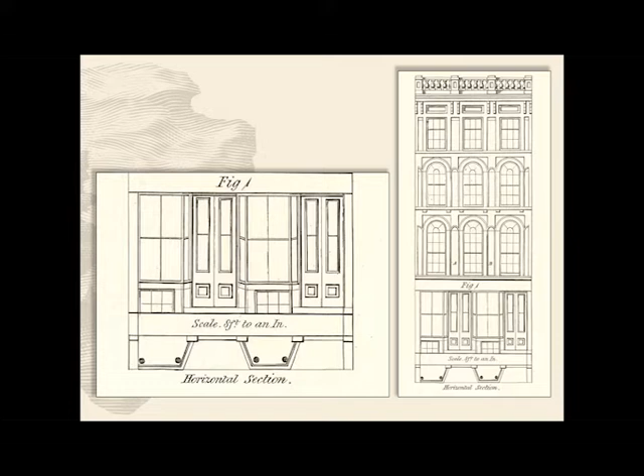The building's structural support was not uncommonly supported behind the storefront rather than always incorporated into the storefront frame itself, allowing for much thinner, more delicate framing profiles. You can see some historic drawings of that configuration there. Very thin framing profiles and metal construction became widely used for storefronts much earlier than people realize, even as we start to dig back through all this.

Storefronts have a wide range of distinctive materials as we continue through time. In the 1920s and all the way through the 50s, pigmented structural glass with trade names such as Carrara or Vitrolite became very popular. While these might not be the original storefronts per se, a structural glass storefront often has achieved significance over time and should be retained. Preservation Brief 12, available on our website, deals with that, specifically with structural glass.

By the mid-century, storefronts were characterized by bright, bold colors and signage. We had aluminum finishes, clear aluminum designs that incorporated the entire facade of a building. These are things to consider when you're looking at perhaps a district's period of significance. Were there modernization efforts that were across the board that alter these buildings significantly, and are they important?

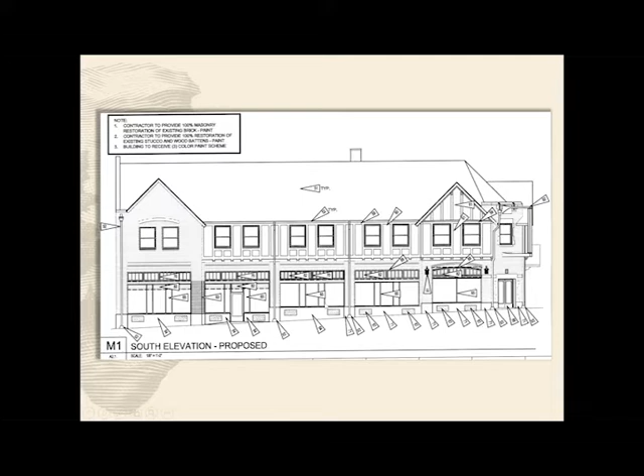For the new design of replacement storefronts, the architect was attempting to reference the historic configuration without actually replicating what was there. So we see them trying to simulate where those central entries were, and we end up with these additional vertical mullions that create odd small pieces of glass within the storefront—an incompatible configuration.

So in consultation with our office, they cleaned that up a little, removing the extra vertical mullions that weren't necessary, and widened those into a three-part display window system that was appropriately proportioned. The new storefronts at the end of the day are compatible new features, and it turned out very nice compared to where we were at the start of the project—a little bit of tweaking.

Again, we're not forcing people to restore, even though we have a historic image. It just has to be compatible if it's missing. But you do have to be careful about what compatible means and how those details actually lay out on paper.

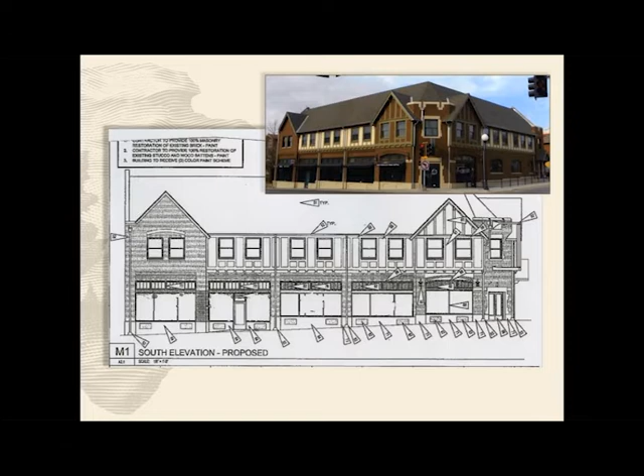So in thinking about new compatible storefronts, the most important factor we consider in our office is that when a storefront is closed, the design must either match the historic configuration or be compatible with the historic building.

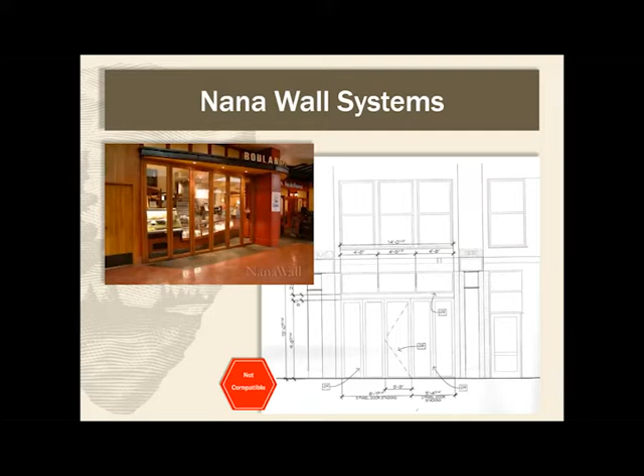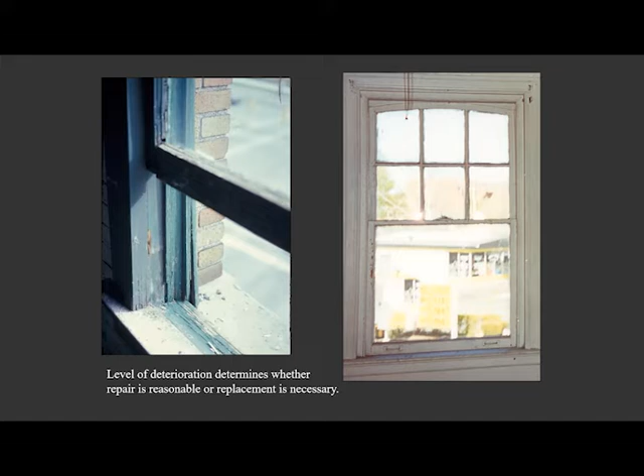The level of deterioration is important as we start to assess these. The true condition of a window may be concealed by peeling paint and missing putty, and those things are easily corrected. Even severely weathered surfaces and pockets of decay may be repaired with treatments such as modern epoxies, but it's most reasonable to make this sort of repair only if it involves pretty limited areas. If you have a lot of windows with the same repetitive issues, that might not make sense, and replacement might be warranted.

When we evaluate windows for repair or replacement, deterioration should be the primary concern in evaluation. Though there can be other factors to take into account, note that the desire for easier maintenance is not justification alone for replacing windows. We often see that - people wanting to shift from wood to aluminum just because it's easier to maintain. There are a lot of other factors we have to look at before you can make that decision.

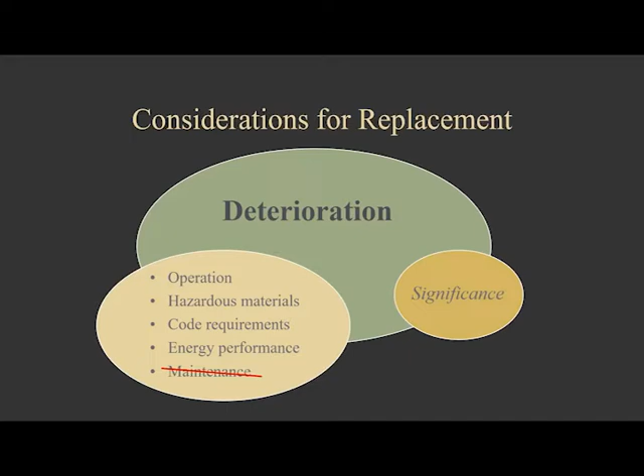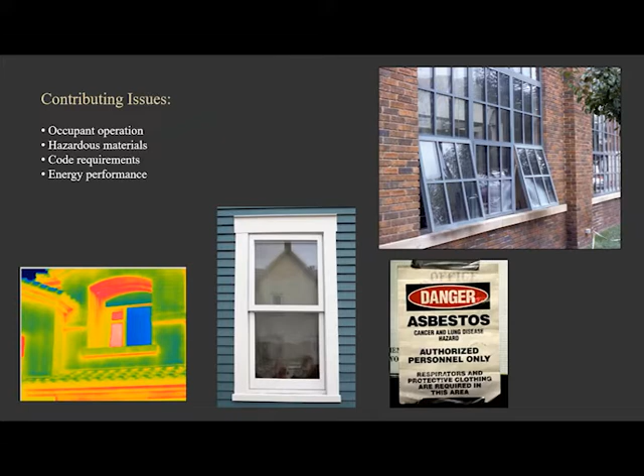Some of the contributing issues we consider help determine the practicality of retaining and repairing windows in conjunction with deterioration. These include operation, depending on the new use of a building; hazardous materials, perhaps lead paint or asbestos glazing compound; code requirements for life safety, whether fire code or egress out of residential use; and energy performance, which is the most common desire in new window applications that we have to consider.

Typically, a full, detailed, extensive window survey is not always necessary. Kim mentioned earlier that there may be situations where we do ask for that - it depends on the building and what's happening. But for every project, we don't typically require that. We do need adequate photographic documentation, both interior and exterior. It's important to show both sides of the window.

The exterior side of a window might have significantly different conditions than what's happening on the interior, so it's important for us to know what's happening on both sides.

Photographs should be keyed to plans or elevations. Look at what existing conditions there are. There might be storm windows on the building right now helping protect windows, and if so, the condition of those windows underneath might be in better shape than ones that don't have them. It's easy to look at peeling paint and cracked putty and say these windows have to go, but there's a lot more to it than that.

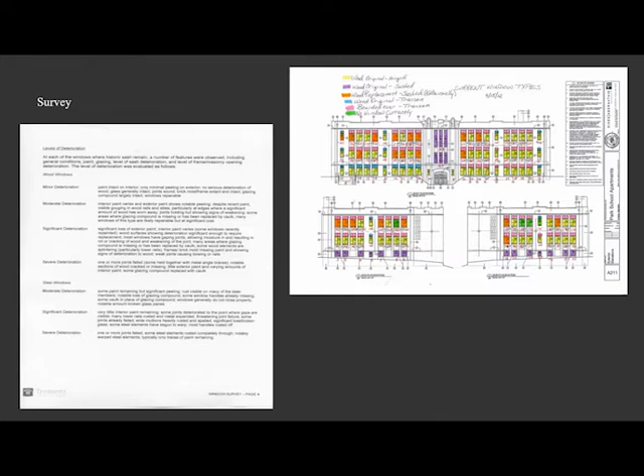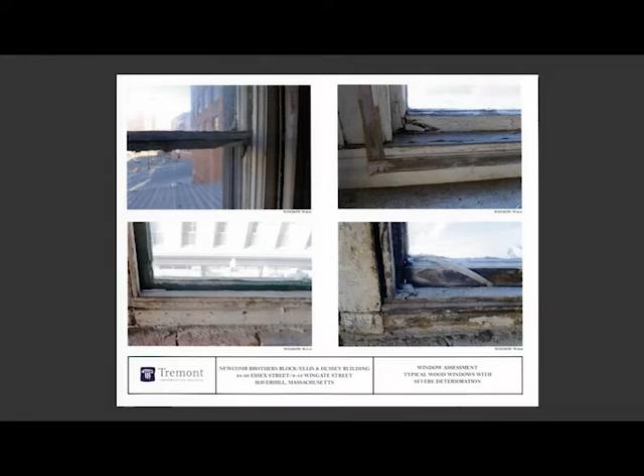But regardless, photos are key here. We need really, really good photos. Just standing a mile away looking at the exterior of the building is not going to help us. So get that telephoto lens out on the exterior, get up close to the windows on the interior, and really help us understand what is happening with these. Because unfortunately, as much as I would love to be, I can't get out there and see all these buildings in person. So I really rely on you all to put together that information to help us review this and help you through the application process.

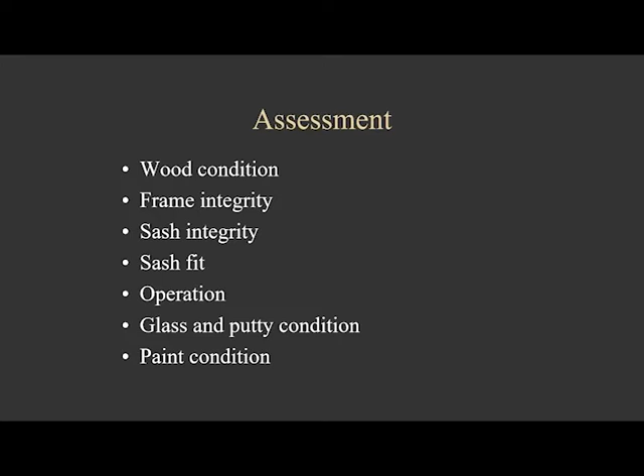Here's just a quick list of, as we start to assess windows and all the pieces and parts that go into it, what we start to look at. We've already talked about some of these.

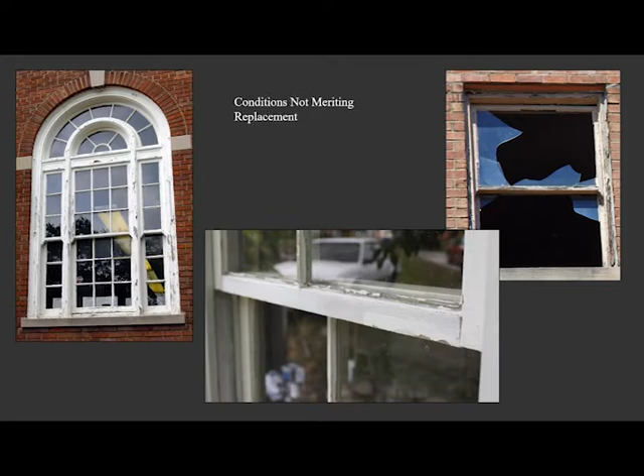Here's some photos that show conditions that do not warrant replacement. On the far left, you have some peeling paint. It's very superficial, you can scrape that and repaint it, and it's good to go. The middle image shows cracked or missing glazing putty that can be easily repaired. On the upper right, you see broken glass, which is also easily repaired. These might look a little scary or daunting at first, but when you take a closer look, these are repairable conditions.

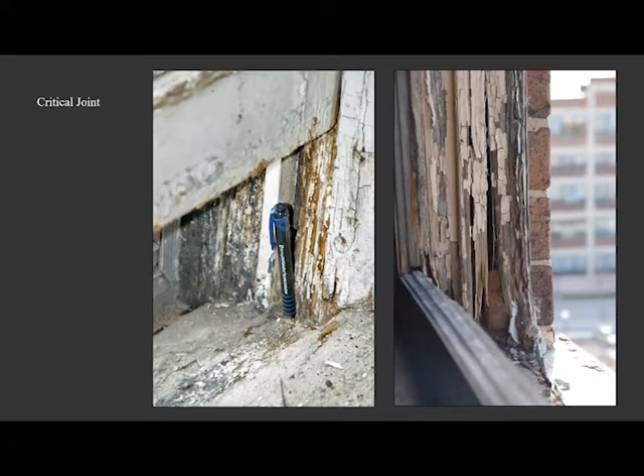Here's one that is so bad you could shove a pen down into that joint, and that's a critical joint in the structure of the jamb. The image on the right, you can see we've lost a lot of the profile section, and if you were to try to screw anything into that, it would just go right through or fall off the face of what solid structure remains. So detail photos, I think that's the key thing here, is look at how much information you can share with us by giving these detailed photos as part of your application.

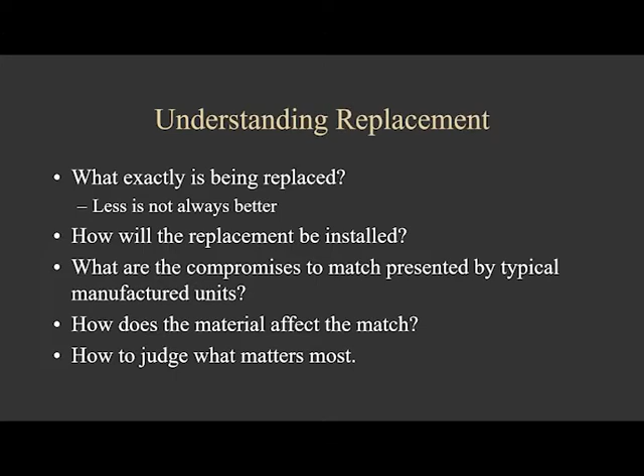So if we start to then look at understanding replacement, what is exactly being proposed for replacement? Sometimes replacing less, the intention is good, that you're trying not to touch as many things, but it isn't always better, and we'll take a look at why. Then the question is, how will the replacements be installed if we do agree that replacement is necessary? Are there compromises we're going to have to come to based on the available manufactured units and the type of window that you're needing to put in the building? How does that material affect the match? Based on all of these, then we can judge what matters most in these window components.

Just a quick side note, we see a lot of projects that retrofit existing historic windows with insulated glazing units. It's not impossible, it's certainly doable in various types of windows, so always something to keep in the back of your mind. But let's get into actual window replacement and what these start to look like, and why we need to be cautious and careful in the details.

Let's take a look at what each of these main three components are. If we're looking at wood windows, there are three basic things that we look at. It's the sash, highlighted here in green, and you can see where that sits in the section.

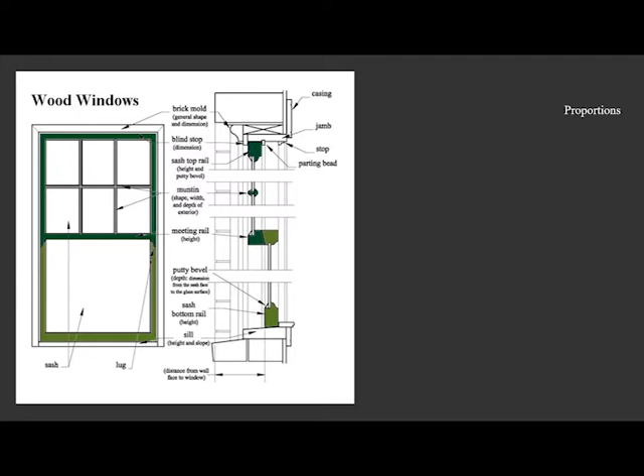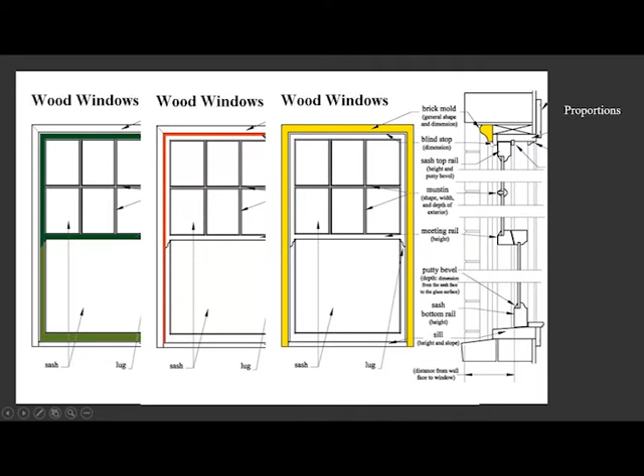Next comes the blind stop, which is historically the small piece that held the sash in place, and that runs all the way around three sides of the window. And then the brick mold, which is the outermost trim part, which is where the decoration tends to come. These are typically profiled, they can be stepped, depends on the window. But when we talk about a basic compatible three-part configuration, this is what we're referencing: the sash, the blind stop, the brick mold.

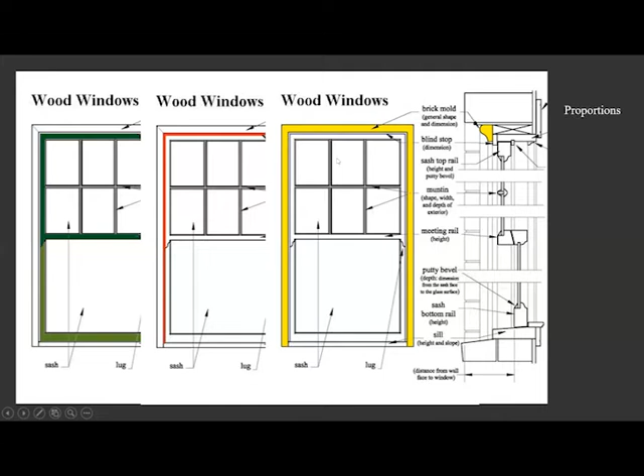So let's say you only need to replace the sash. If the jamb and the frame is all sound, but the sash are rotted, you can certainly have new sash manufactured. In this case, the sill should still be repairable, so you get a nice clean fit at the bottom of the window. Advantages to this are you keep a lot of historic material, insulated glass may be introduced, and there's no disruption to historic trim both on the inside and outside of the building. So it can be a very ideal solution depending on the building.

Other ways of introducing new sash are what we call sash packs, where it's a manufactured system of vinyl jamb liner with two new sash that slide up and down on that. The advantage, again similar to reconstructing true sash, is you can get insulated glazing, still no disruption to inside exterior trim.

Just note that there are some visual things that happen with those jamb liners, so keep that in mind if you are exploring sash packs. And dimensions might not be as customizable perhaps as a true reconstructed wood sash.

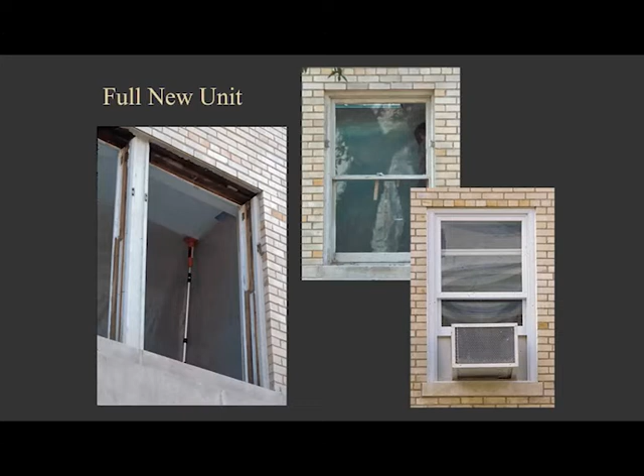Other times we see people proposing just a full new unit, which would slide inside the remnants of the jamb or framing remaining from the historic windows. You have to be careful about this because they can start to skew some proportions. They have a more visual impact. This is what we refer to as an insert unit.

And so this is the big question we always want to know: are you proposing an insert, or are you proposing a rough masonry opening install? A lot of times it's hard to get that information out of people because maybe you haven't thought through the installation all the way yet.

The pro to these is they're inexpensive, and it does keep trim in place. But the con is that they have some significant compromise in those proportions and dimensions, as I mentioned. So you have to take a look at the specific project and building. Maybe an insert unit is a viable compromise. A lot of times it might not be, because of the visual impact that it has.

Here's some examples of an insert. You can see it's very, very clearly a new window that sits inside the historic frame components and trim. And so it does modify the character of those window openings. And then we have a bunch of these on large primary elevations. It does have greater effect.

This is what we refer to as a rough opening replacement or rough opening installation. And here you see that these windows are much better fit to the opening, and they typically replicate that 3-part configuration: the blind stop, the brick mold, and then the appropriate sash reveal. This just gets a better fit to that window.

So a lot of times there are projects where you may be proposing to do an insert, but it might not be appropriate, and you need to explore what it would entail to do an actual rough opening installation.

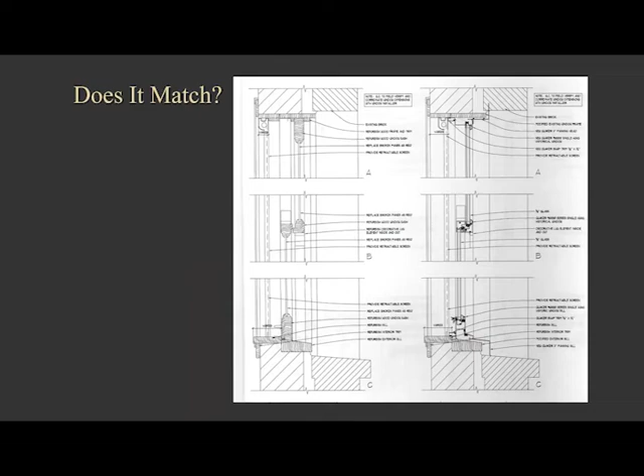So here, this is just a quick mock-up showing you all those components and the dimensions that we would be looking for, both for the existing window as well as the proposed, to then make a determination on the appropriateness of the replacement and match. And here you have both the vertical and horizontal section, you can see at the jamb, and both the head all the way through the sill of the window.

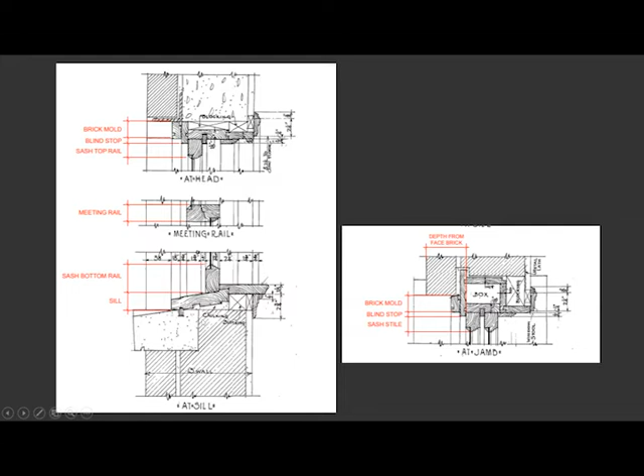And then the brick mold: again, this is the outermost part that can be stepped, it can be curved and profiled, and it's very distinctive in defining the character of a historic window. So if you are doing a replacement, the expectation is that the new brick mold would match that profile to the best ability possible. But there's limitations, as you shift to other materials apart from wood, there are limitations on the details and profiles that you can get.

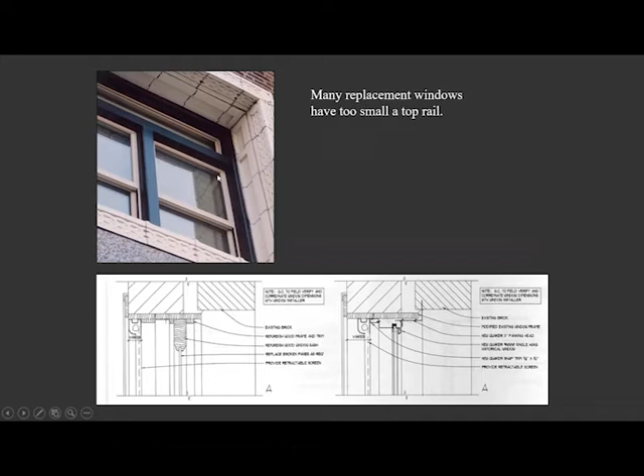Again, here's an example of where that top rail is very, very narrow. You can see the historic on the left in the drawing, and then what the proposed was. That's a big difference between those two. And then looking up the window, it might not make as big of a difference, but it does end up being substantial.

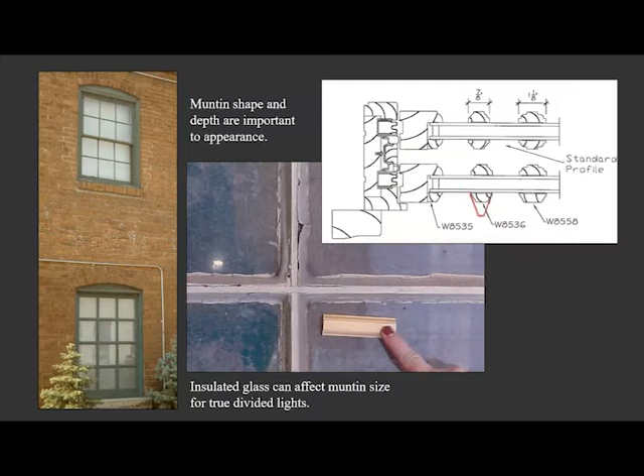Simulated divided lights are the industry term for a three-part assembly, which consists of a three-dimensional external grid applied to the exterior of the window, an interior spacer bar between the glass, and then another grid applied to the interior face of the glass. We have a three-part simulated divided light. It allows for the two pieces of glass for the insulated glazing unit, but what we get is the simulation that true divided light is still there in the replacement window.

It allows for greater flexibility in muntin size and profile, and it can be effective imitation when that component is characteristic to the window and needs to be carefully executed. We regularly approve simulated divided lights in replacement windows.

Looking at steel windows, these often were embedded in masonry wall systems as constructed. So any replacement, keep in mind, we're just going to get a bulkier window. That's just the fact of it, because of how a steel window system was made and installed versus a replacement aluminum. Some manufacturers do it better than others. So those are the details we would look at - are we getting the most minimal dimensions possible or most appropriate versus some that are still more bulkier and inappropriate in dimension and profile.

With the replacement of steel windows comes the need for structural muntins. You can see those running across those windows, and that is to hold up the operable vent. That can't be done in any other way in replacement windows. So you have to take a careful look at how that's detailed, because it can have an impact on the exterior character of the building.

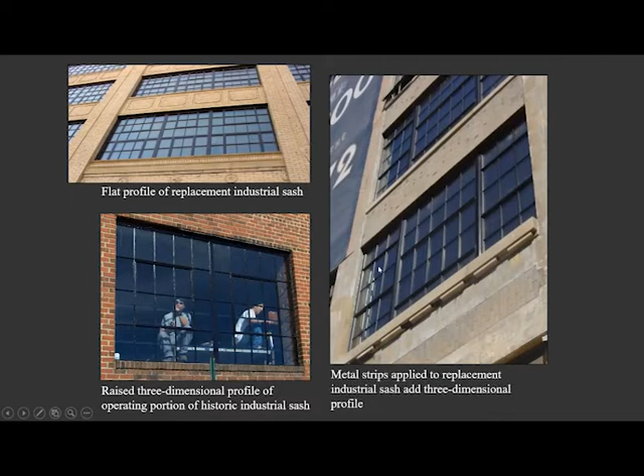If you use applied muntins, they must not be obviously fake. In this case, these ones are bowing from the exterior glass, and that's obviously a very poorly constructed simulated light. Here we only have the interior spacer, so you don't have that three-dimensionality in the exterior expression of the division.

Mullion details are also important. Take a look at mullions—how do these interact with windows on either side of them? How do you detail those in replacements? Are you retaining, are you replacing? That all has to be accounted for within proposed window systems.

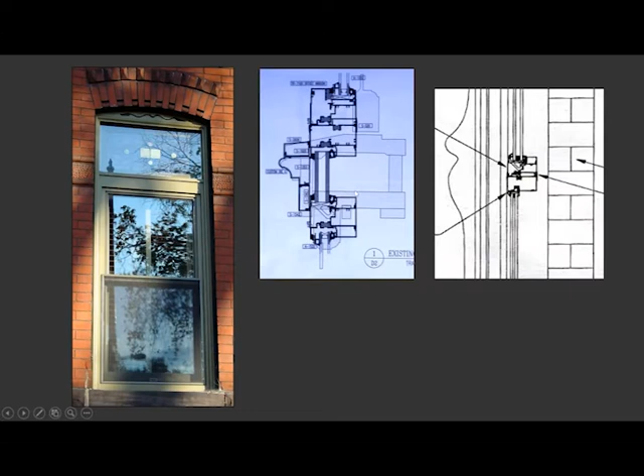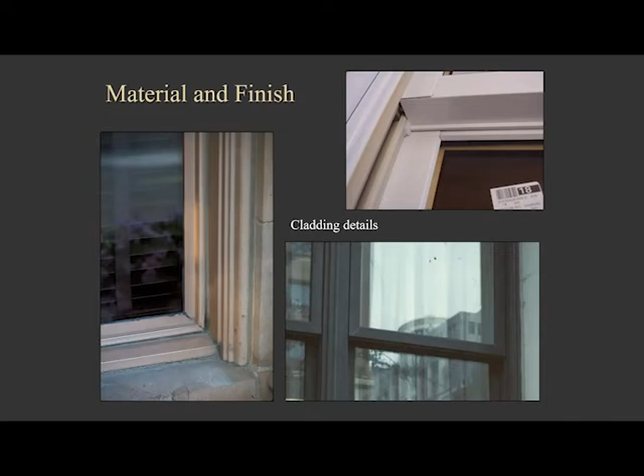Materials—new windows that use substitute materials not only have different finishes, but they also can have different profiles and dimensions from traditional wood, just because they're made differently. They have different assemblies and components. So those are things you have to take into consideration when proposing a replacement, and they can either make a window appropriate or not appropriate, depending on what limitations they have.

Tinted glass did become popular in the mid-century. So if there is historic tinted glass, keep in mind that a replacement would have to actually deal with matching that, rather than just going for a clear glazing replacement.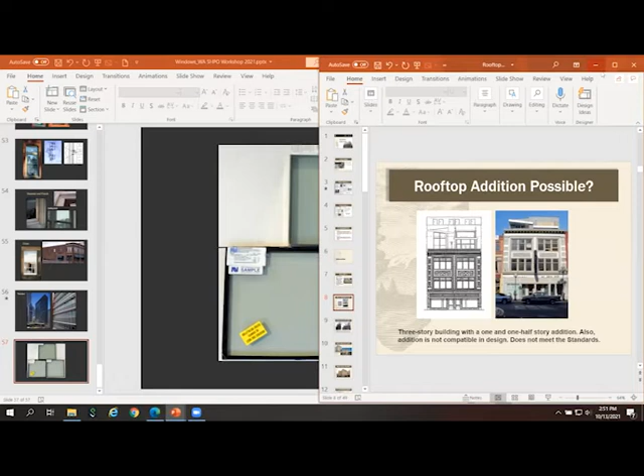And I am quickly running out of time, so I'm going to jump over to rooftop additions. Let me run through this one. Uh-oh, let me start back there.

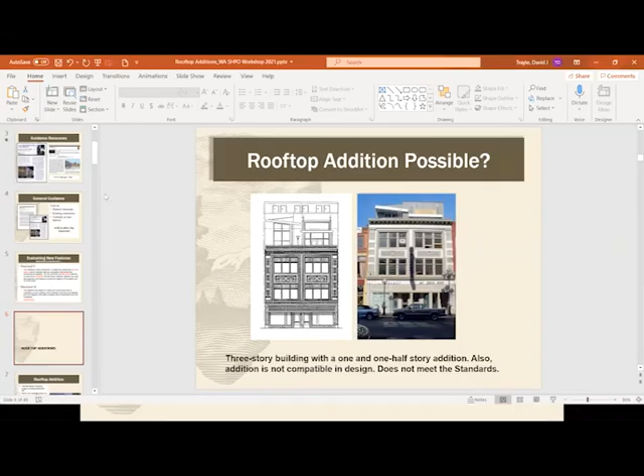All right, so rooftop additions—these can have significant impact to a building. As we see in this example, there are several issues that we look at with rooftop additions themselves in terms of usable square footage, parapets and railings that come with them, and last but not least, we can't forget about any HVAC equipment that goes up there as well.

In terms of guidance, we have a lot of published guidance on our website—please take a look. We have various ITSs as well as a white paper specific to rooftop additions, as well as general guidance for additions in any capacity. So we have to look at the historic character of a building, the existing conditions, as well as visibility, to determine if a proposed rooftop addition will affect the character of the building.

That's the big question. In terms of standards, we can look to Standard 9 and 10 in terms of what is appropriate and how we must review this in context of our program. New additions shall not destroy historic materials.

They need to be differentiated yet compatible. There's that compatible word again, it's very important. Standard 10 references that new additions shall be undertaken in a manner that if in the future they're removed, they don't necessarily... there's a reversibility component to that. You're not damaging the historic property and its environment.

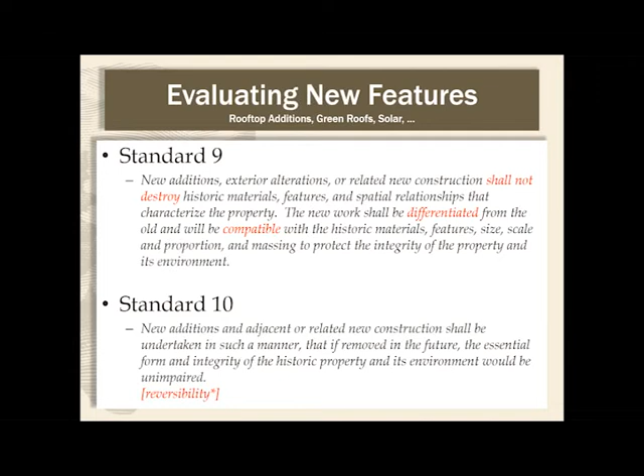Keep that in mind. All right, so let's get into rooftops. Our guidance, our white paper guidance on this has 5 questions that we ask when we're assessing rooftop additions. Number 1, can the historic building accept a rooftop addition at all? Is this the type of building that can handle it?

Number 2, from what vantage points is it appropriate to evaluate the rooftop? How far away can we actually look at these? Number 3, if a rooftop is determined to be appropriate, where should it be placed? Can it take up the full footprint, or does it need to be localized somewhere within that building footprint? Number 4, how much should a rooftop addition be set back? And lastly, how should a rooftop addition make clear what is historic and what is new? How do you walk that line of compatibility?

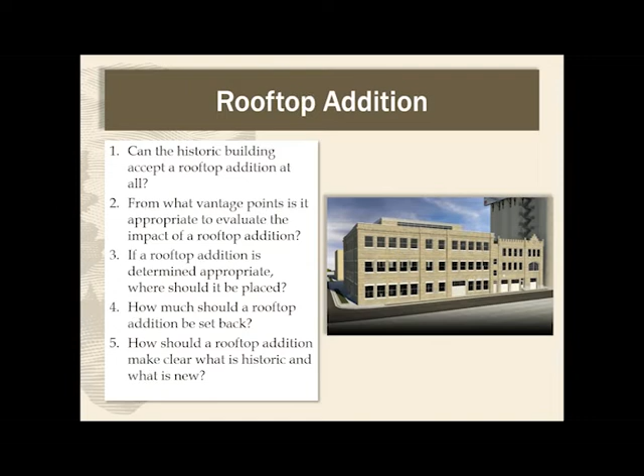So here's a 3-story building that has a 1.5-story-ish addition on top of it. It's also designed in a way that is not compatible. This is just a scale of building that should not be really getting a rooftop addition. Generally speaking, rooftop additions are not appropriate for buildings less than 4 stories tall. Additions to buildings of that size can dramatically change the massing and as a result change the historic character of the building.

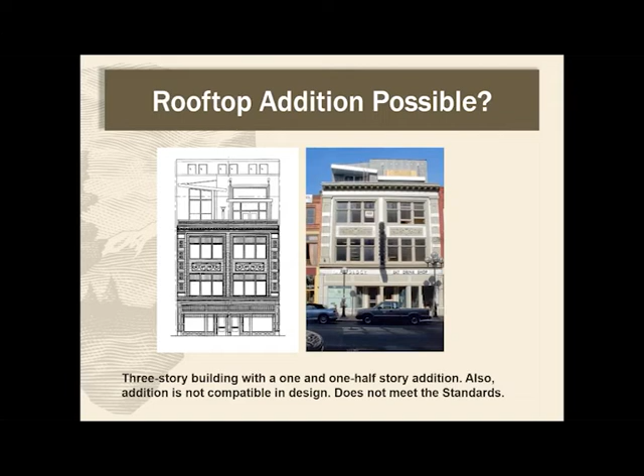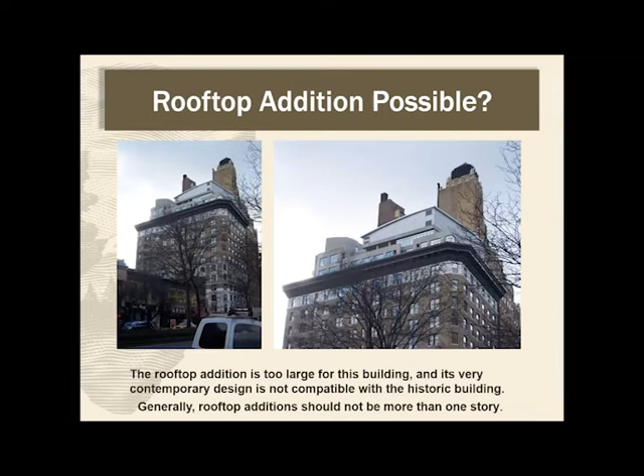So this image shows again that 1-story or 1.5-ish addition on 3 stories. This does not meet the standards. This 3-story addition on a 12-story building is incompatible due to its size and placement, as well as the detailing of it. While it's simple and perhaps a 1-story addition would be appropriate, this is, again, multiple stories. The addition negatively impacts the character of the historic building. This one does not meet the standards.

So the next question: where is it appropriate to evaluate the impact of a roof addition? Distance is dictated by visibility. I will say there's no set dimension. It's not like, oh, anything beyond 500 feet or a block, we don't care or don't look at that. That's not true. Depending on the type of building and the size of addition, that's going to dictate where we need to go to look at that.

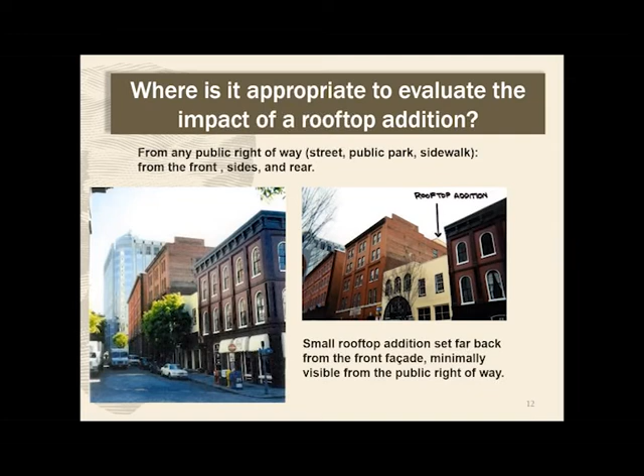And in this case, it's not appropriate to evaluate the impact of an addition from privately owned empty lots surrounding it. That's not the case here. But we go by public right of way, so wherever we can be on streets or sidewalks, looking through parks or across parking lots, that is all fair game. But we would not go onto adjacent buildings and look down on the addition, or stand in private buildable lots next to it and start making review decisions from there.

So if we do determine that an addition is appropriate, where should it be placed? In this case, the guidelines recommend setting the addition back from the wall planes to help make it as inconspicuous as possible. Setbacks should be considered for all elevations that can be readily seen. In this case, it's a 4-story commercial building with a 1-story rooftop addition that was set back almost halfway from the front facade, which makes it very minimally visible. High party walls on either side also help reduce the impact. The addition does not change the character of this historic building.

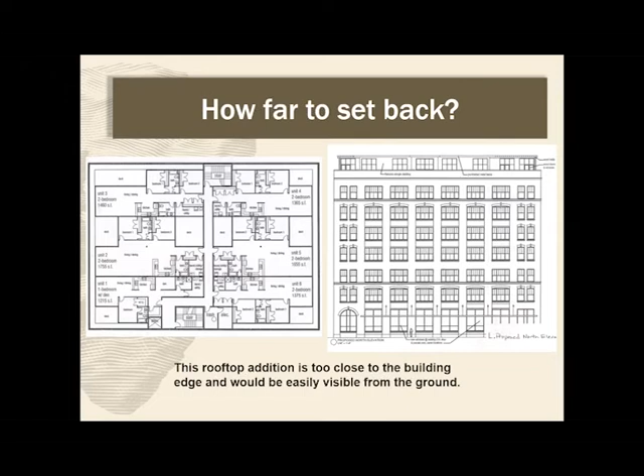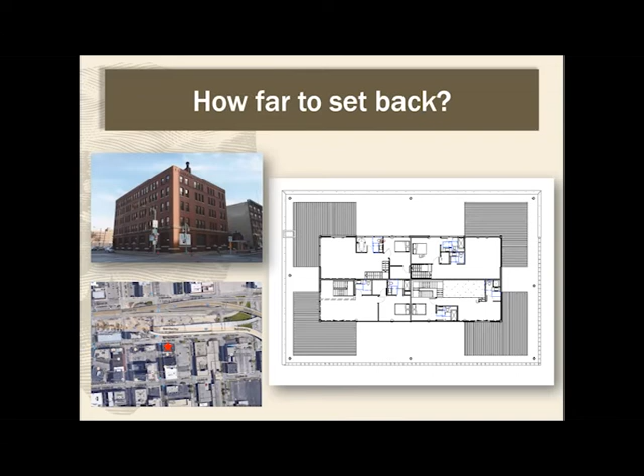Here's an example of a building that has a completed addition, and look at the articulation of the architecture. So you have multiple primary facades and one clearly secondary facade. Although visible, it's distinctly different from the other elevations. And so in this case, it was determined that a small rooftop addition could be built to that edge because it blended with both the materials and color with that secondary elevation, matching the expression already happening up there on the historic building.

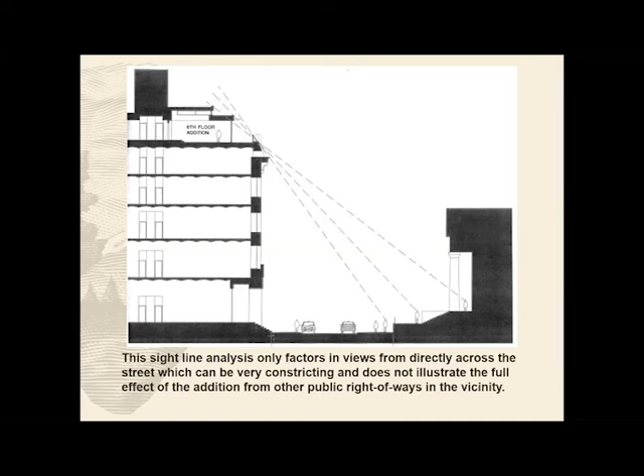It's often hard to tell how accurate a 2D sightline study is when reviewing a proposed addition. This example is from that same project as the previous slide, showing only the view from standing on the ground—where you wouldn't expect to see a whole lot. But once you go down that street and look three-dimensionally, it's a whole different expression.

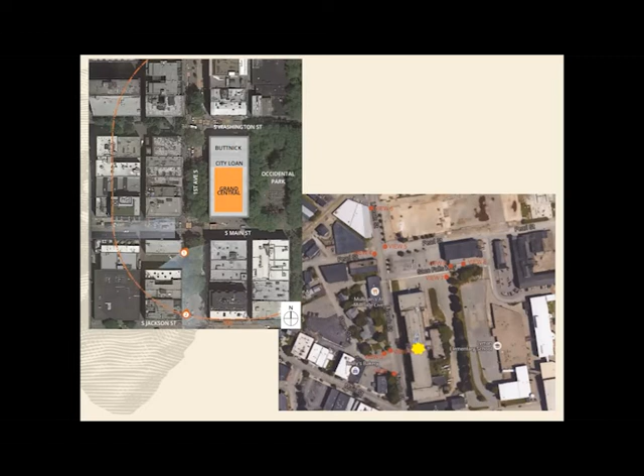A few things to wrap up here—I want to talk about railings briefly. Railings might seem inconsequential, but they can be highly visible depending on the building and roof system. Railings are typically necessary for patios or decks, pools, mechanical access, and mechanical platforms.

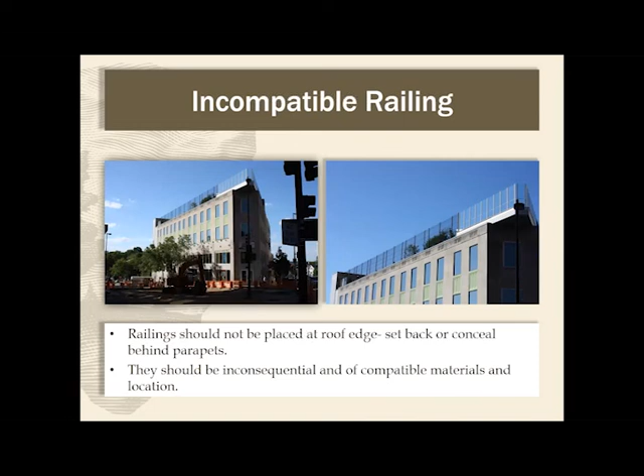Here's one that had no parapets, and the railing is certainly smaller and less intrusive, but it still is an incompatible railing system because it's at the edge of the building. It's highly visible. And in this case, we also likely have an incompatible addition on the building as well. Railings can have impact just as much as the physical addition itself.

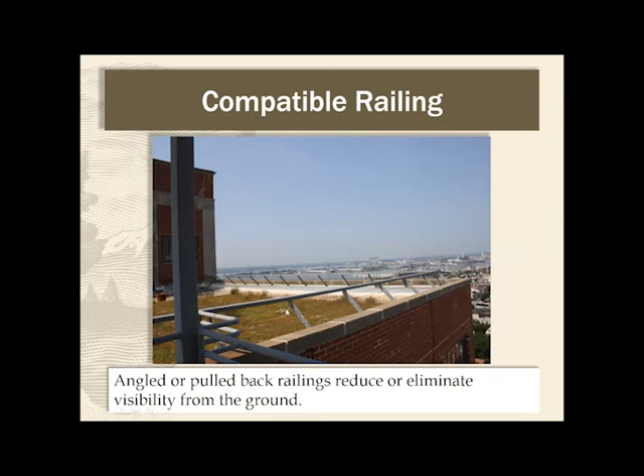This is an example of a good compatible railing system where they angled the railing backwards behind a parapet. So standing on the ground, it helped minimize the visibility of that top rail edge while providing code compliance. That's a good example.

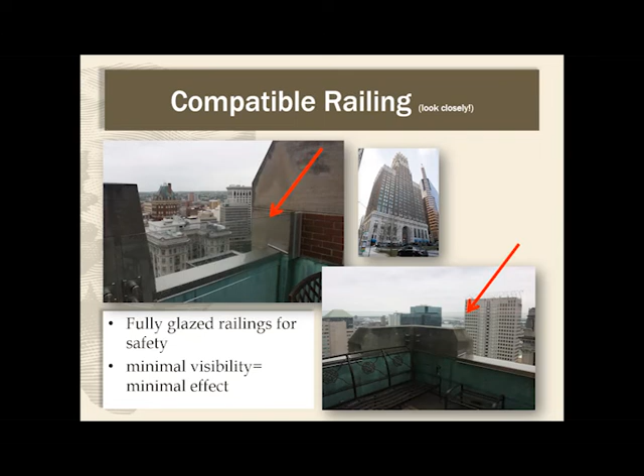Glass railings can be very beneficial, especially on large scale projects. At the top of these buildings, you would never know this glass is there. The one thing I will say though is glass is not invisible. So on lower scale buildings, there's still a reflectivity component to it. Even if it's glass, it doesn't mean they're invisible and always compatible. So keep that in mind. This can be a very good solution depending on the scale of building.

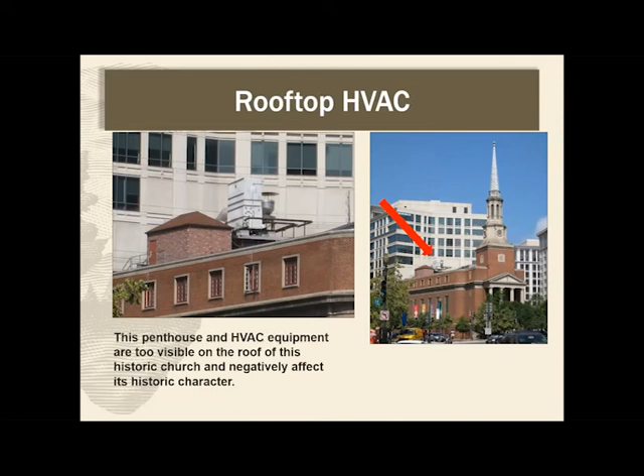And HVAC, let's not forget that. This is often something that gets left out of applications and then suddenly shows up in the part 3 photographs we had to deal with at the end of the project after everything else is said and done. Be mindful of these, we should know about these details up front. Look at the impact of this on a church building, both the access penthouse as well as the mechanical platform itself. Again, utilize the architecture of the building to your advantage.

This has a parapet that isn't solid, but it certainly helps screen any of these mechanical systems that are up there. In this case, it was a taller solid parapet, which gives a lot of flexibility on loading those flat roofs with the equipment necessary to support the new rehab use.

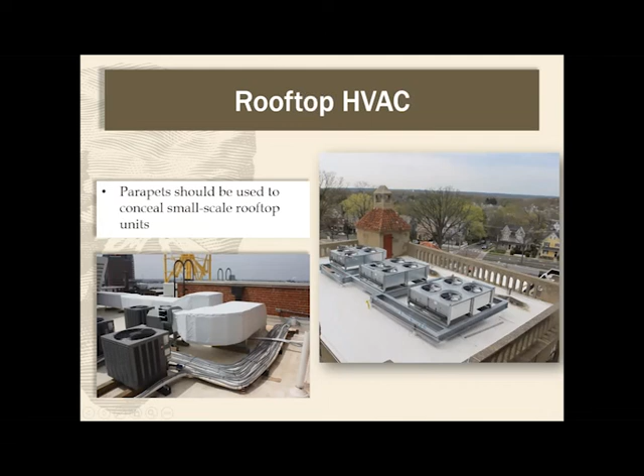Scale matters. On the left, you have a small scale building with a very large mechanical platform, obviously an incompatible treatment. On the right, you see examples of a dense urban environment with flat roofs, parapets, and those can support very large systems. So scale plays an important role in assessing that as well.

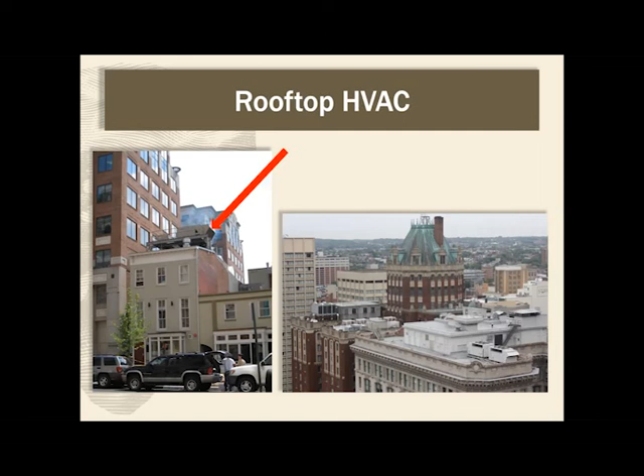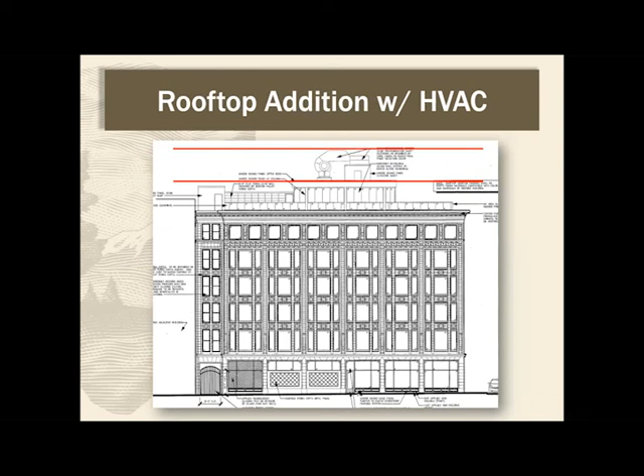Here's an example of a building that was proposing an addition as well as rooftop mechanicals. In this case, we had a tall addition, but then in the review process, they didn't necessarily share with us that these mechanicals were proposed to go on top of the addition. So we have essentially 2 layers of things happening to this building.

So the HVAC details are important, and they should come early in the process as soon as possible. You should share these as part of the sightline studies, as well as elevation drawings, mechanical plans, because they can make or break a situation.

But some historic sites or buildings have a lot of flexibility. In large industrial complexes, the very nature of them were industrial with large mechanical systems on the roof, on the ground, all over the place, and that's the character of them. So in that case, putting new systems and rooftop equipment may not be much of an issue at all. In fact, it probably would be in line with the historic treatments of the property. So again, it just depends on the type of building and the type of property.

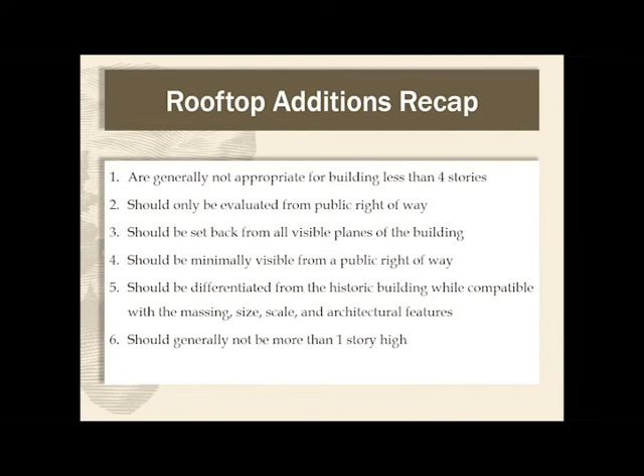And here's just a quick recap on what our white paper guidance is, but that is everything. I appreciate you guys sticking with me. I know that was a lot to push through here in a short amount of time. So that's it from me, Kim. If we want to open up for questions, I'd be happy to take those.

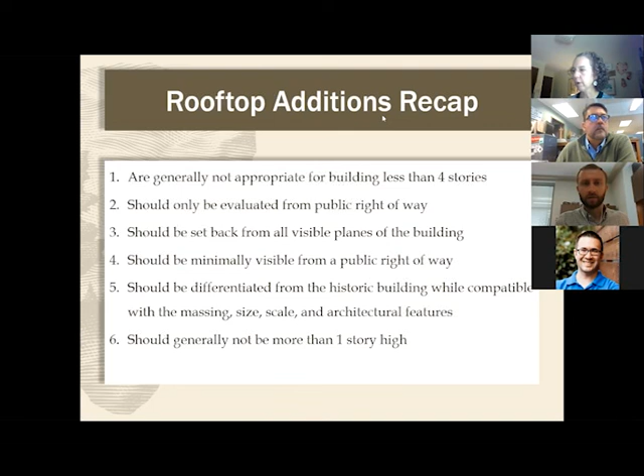Yeah, that rooftop addition, that last one, that was a good time, wasn't it? It's got a little cornice poking out under its little shoulder. And that's sad. It's one of those things you have to just shake your head. You can't even believe it's real.